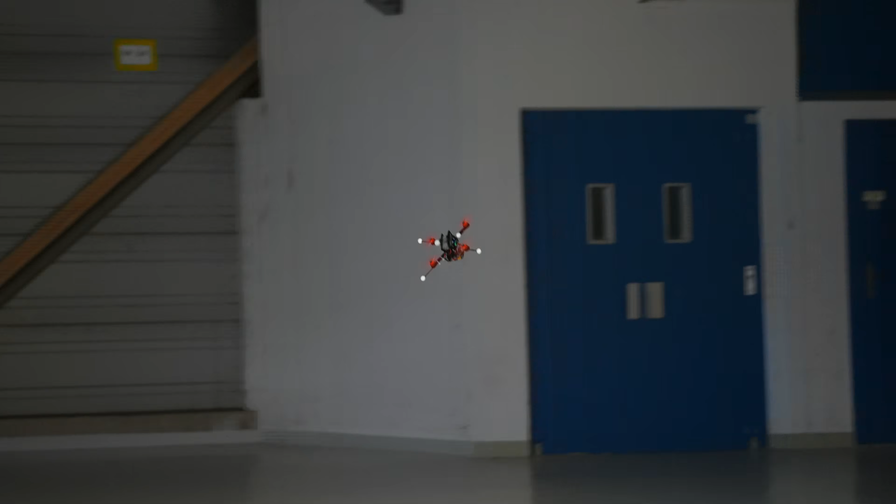In this work, we present an adaptive nonlinear model predictive control architecture for aggressive quadrotor flight under uncertainty. Recently, nonlinear model predictive control methods have been successfully deployed onboard quadrotors to achieve highly aggressive maneuvers with precise tracking accuracy. The performance of MPC depends highly on the accuracy of the underlying dynamic model.

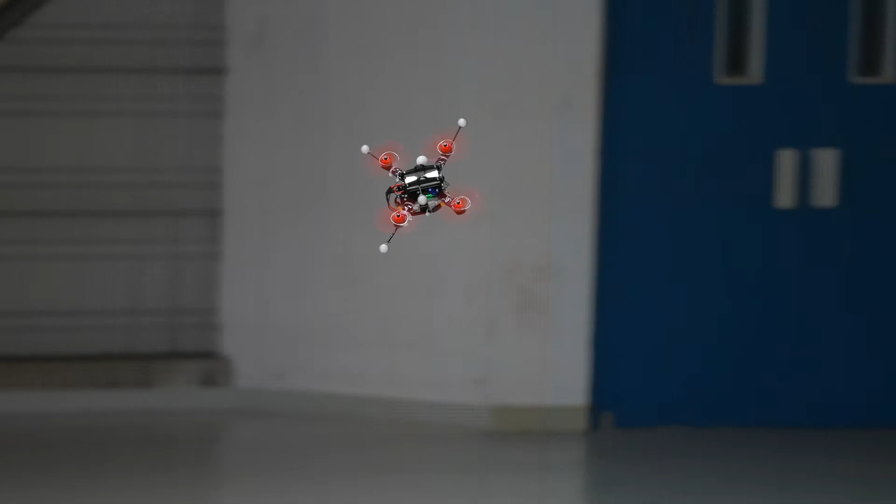In reality, however, obtaining accurate model parameters like drag and thrust coefficients can be cumbersome and prohibitively expensive. Recent advancements in system identification enable learning of sophisticated dynamic models using Gaussian processes. The learned model can be integrated within an MPC, however this comes with significant computational overhead and does not enable the controller to adapt to a changing system.

To address this problem, we propose the following cascaded control architecture, which couples a nonlinear model predictive controller with a nonlinear observer-based L1 adaptive control law.

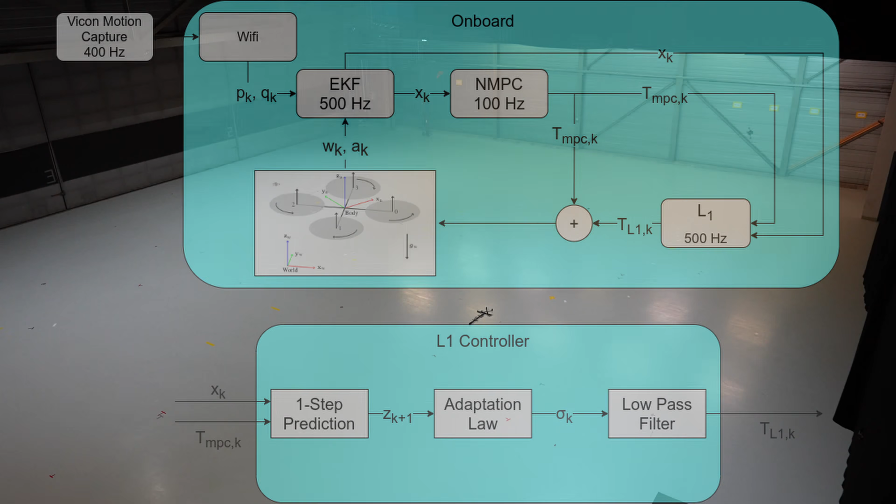To show that the adaptive control law can compensate for unmodeled aerodynamics, we fly increasing speed circle trajectories up to 10 meters per second. Our method, shown in red, outperforms a data-driven MPC based on Gaussian processes by over 70%. Even without an aerodynamic model included in the reference dynamics, we see significant performance improvements.

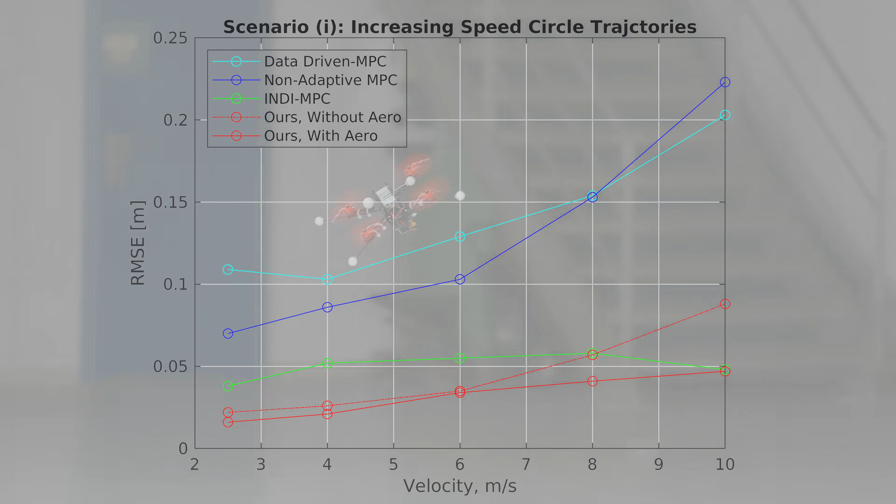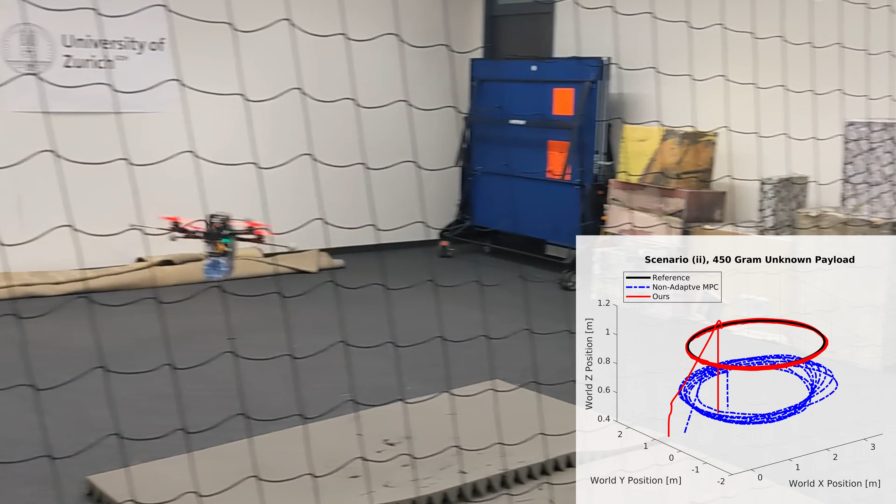Next, we introduce a large payload disturbance of 450 grams without updating the MPC model. This results in a mass mismatch of over 60%. Our method, shown in red, accurately tracks the desired circle trajectory despite the large disturbance. The non-adaptive MPC, shown in blue, cannot compensate for the model mismatch, resulting in significant tracking errors. We can even deliver ice-cold beer.

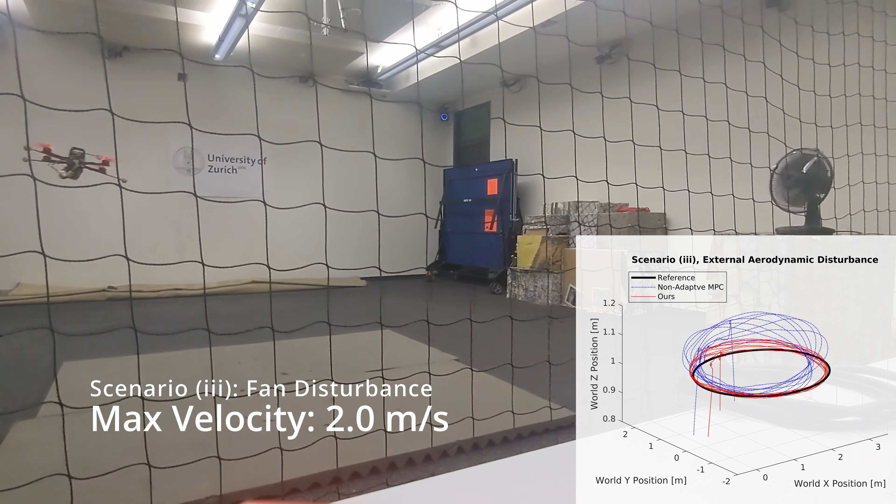In scenario 3, we introduce a static external aerodynamic disturbance and attempt to track the same trajectory from the previous test scenario. The non-adaptive MPC, shown in blue, suffers significant tracking performance degradation, while our proposed method, shown in red, keeps the system close to the reference despite the disturbance.

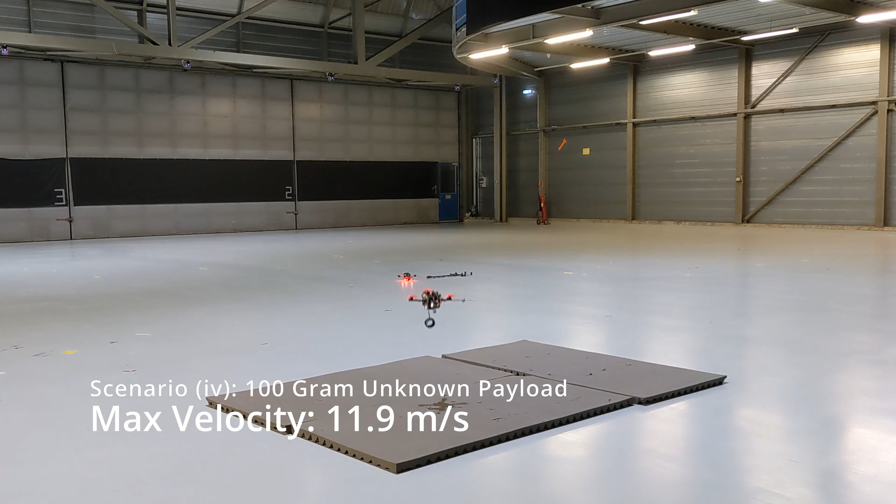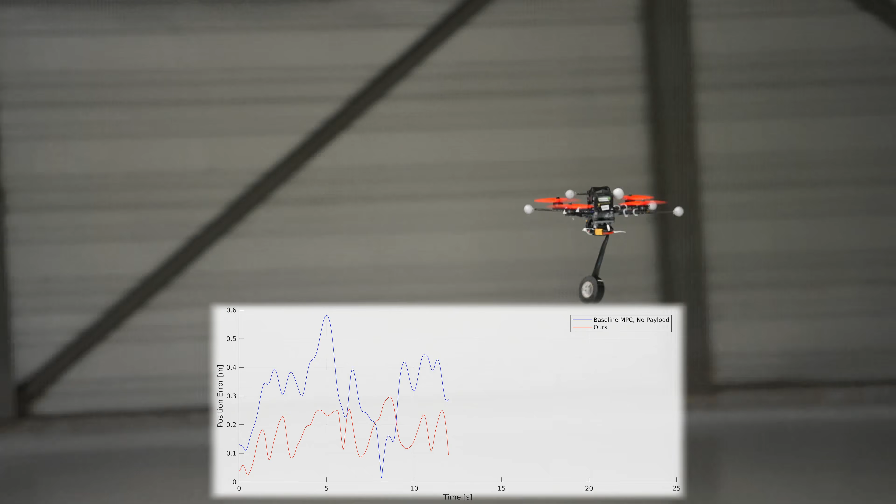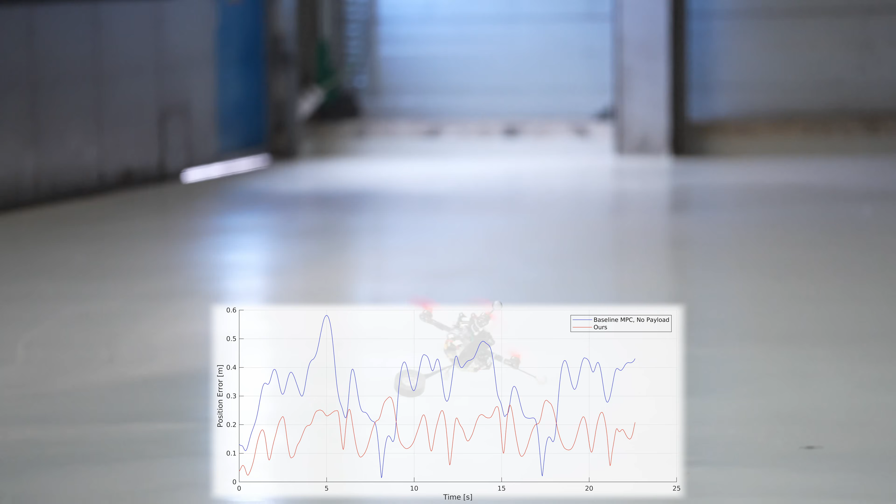The addition of the adaptive inner loop controller significantly improves tracking performance even with the time-varying disturbance. In one instance of this test, the slung payload hit the rotors of the quad, dislodging it from the platform. The adaptive controller was able to immediately react to the system change and save the quadrotor from crashing.

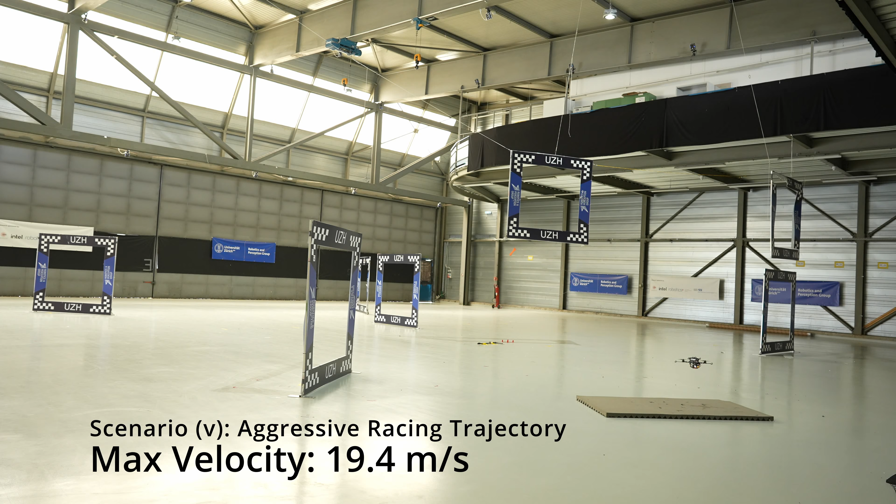For the final scenario, we fly a highly aggressive racing trajectory with linear velocities of 19.4 meters per second and linear accelerations of over 4 Gs. The controller keeps the tracking error to a minimum, allowing the quadrotor to navigate a difficult split S maneuver at high speeds.

The addition of the adaptive controller is relatively straightforward to implement and offers large performance benefits relative to the non-adaptive MPC. Interested readers are pointed to our paper linked below for further details.